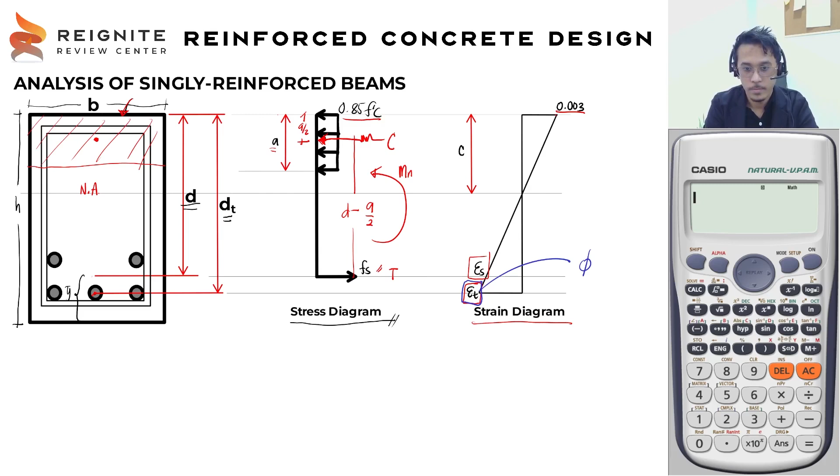Okay, so let's try this problem. A rectangular beam has B, or width, of 300 mm, and an effective depth of 500 mm. As is equal to 3 pieces of 25 mm diameter. Compressive strength of concrete f'c is 34.2, and steel yield strength Fy is equal to 414 megapascals. Calculate the design moment Mu using NSCP 2015.

Okay, so ganito lang yung gagawin natin. Drawing natin yung beam para mas clear. So I advise lagi na mag-drawing kayo. So this is your 300.

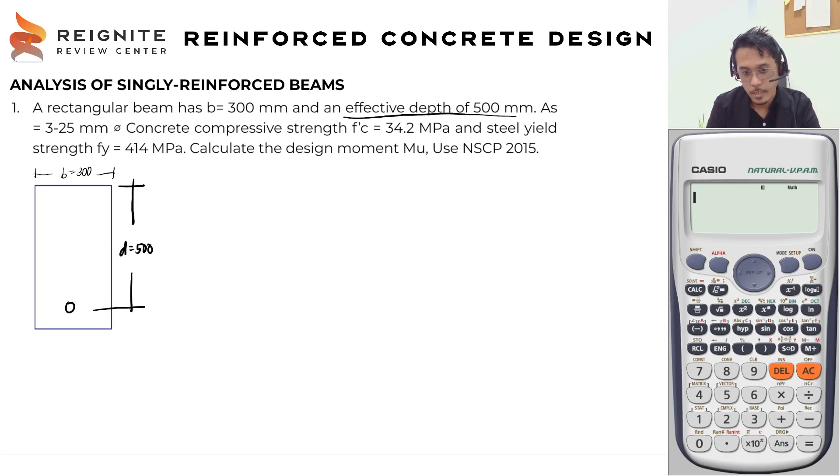So, here yung ating AS, yun ay mayroon tayong tatlong 25 mm diameter. Then, ilagay ko lang din yung ibang parameters. So, F prime of C is 34.2. And then, Fy ay equal sa 414 megapascals.

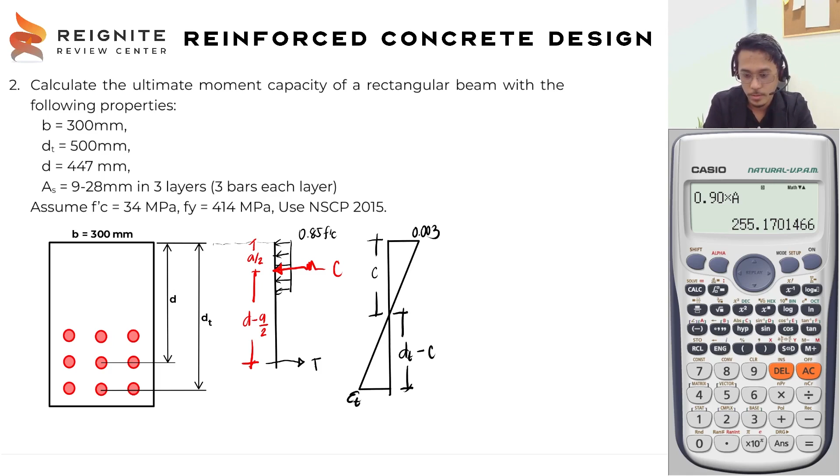Okay. So kanina, we tried na assume natin yung, bigyan natin ng 9-28 mm. Sulat ko dito yung solution. So, assume ulit tayo dito na fs ay equals sa fy, or nag-yield yung bakal natin. Okay? So, here, we will use C equals T.

So, 0.85 f'c times a times b equals As fy. Okay? So, 0.85, f'c natin here ay 34. Tama ba? Yan. And then yung a natin dyan ay unknown. And then our b is 300. Then As, siyam na pi over 4 times 28 squared. And then fy natin, as stated sa problem, ay 414 ulit.

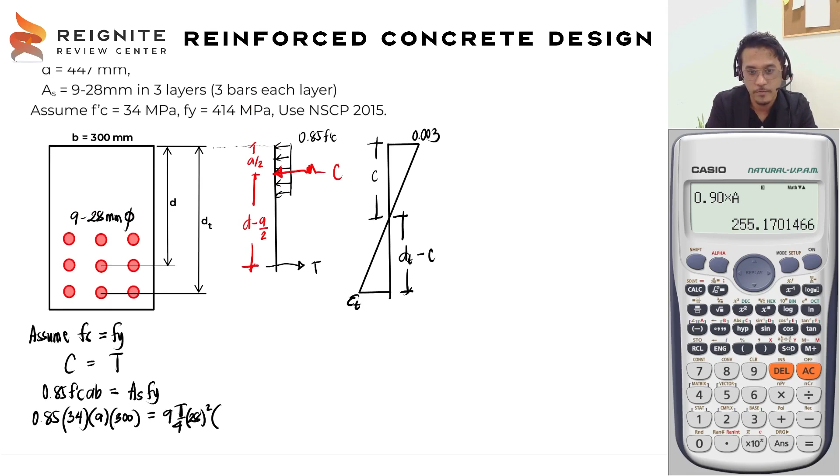I-check natin ngayon kung tension controlled pa ba siya or not. Okay, so dito, 9 times pi over 4 times 28 squared, then times 414. Then divide natin yan sa 0.85 times 34 times 300. So may nakuha tayo dyan na 264.624.

Ayan. Okay, so try ulit natin yung kanina. Check natin kung tension controlled ba siya or not. Kasi kung hindi, we have to know the value of epsilon sub t and yung ating fs dito, As fs. Okay, so for a value of a max, kailangan natin yung beta 1 times yung ating c max. So ito ay beta 1 times 3/8 d sub t, para malaman natin kung tension controlled siya.

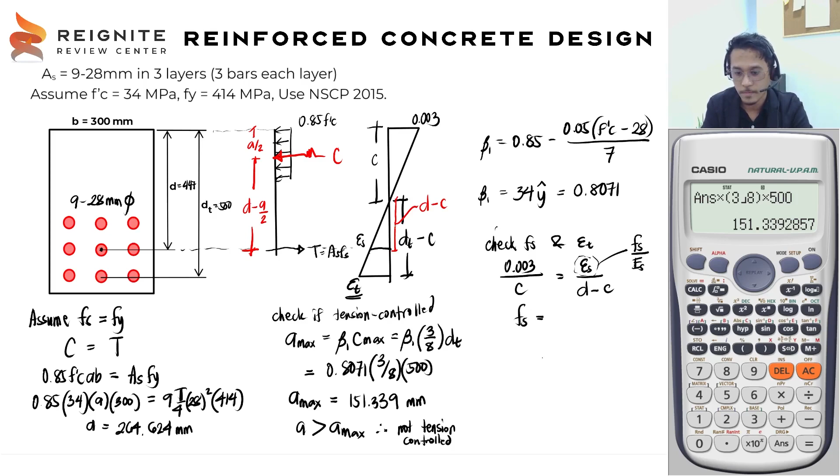Okay, so paano natin kukuhanin ngayon yung value ng c? Kanina na-prove natin na not tension controlled. Therefore, kailangan natin kuhanin yung value ng c, which is equal sa a over beta 1. Compute natin. Kanina meron ako ditong in-store na 264.624. Divide natin siya sa beta, 0.8071. So, we have here 327.8705.